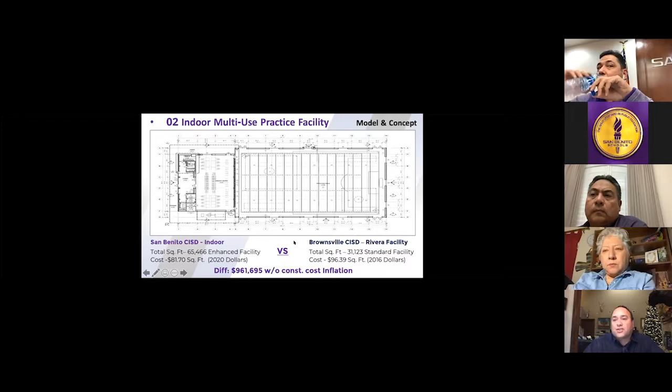The Brownsville Rivera has a total square footage of 31,123 square feet. We want to call it a typical standard facility, just given the fact that there were a lot of limitations to that design, as well as the overall construction project. Back in 2016 they constructed that facility at $96.39 a square foot. Through all of the needs assessment and what the district was looking at realizing with this facility...

The Brownsville facility is a 60-yard facility with limited markings, but San Benito instructed us they really wanted a full multi-use practice facility. We reverted to an 80 to 90-yard unconditioned practice space facility. Really, the reason we went to that length was so it could accommodate your marching band formations. So it's really suited not just for athletic sports, but it accommodates band and so forth.

And we'll go further into it, but this is the general scope. Your building is 65,466 square feet, as you can see, more than twice the amount of the Brownsville Rivera facility. The cost, once we went into both GMPs, we got it at $81.70 a square foot, much lower than Brownsville. The next page will go on a comparison.

So if you look at that, those are 2020 dollars, 2016 dollars. The difference in the cost per square foot, we got obviously a better deal, at about a savings of $961,695, and that's without construction inflation from 2016 to 2019. We really started in January of 2020, but in 2019 we were doing the offsite utilities.

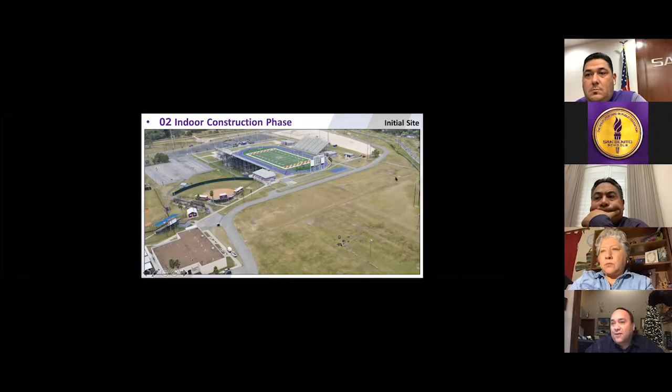This was the original site prior to us getting started. So really, when the site was selected, a question came up about why we're a little bit further on this side. As you can see, there are overhead power lines here, so in order to evade a lot of this, we shifted the building a little more further west.

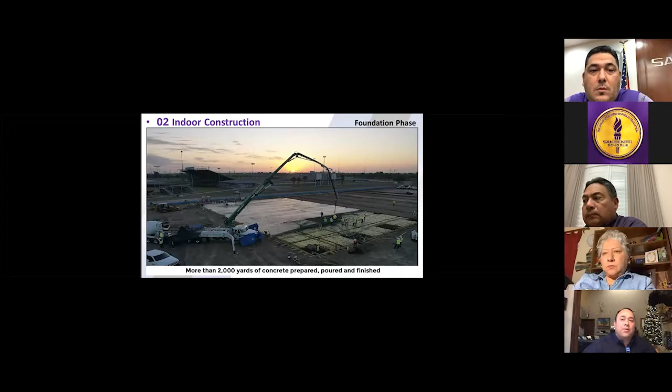We poured more than 2,000 yards of concrete, prepared, poured, and finished for this project. All pouring started at 3 a.m. and carried on to probably midday. Most pours are scheduled early in the morning, giving the crews a chance to finish the pour, as well as all the required prep work and finish work they have to do.

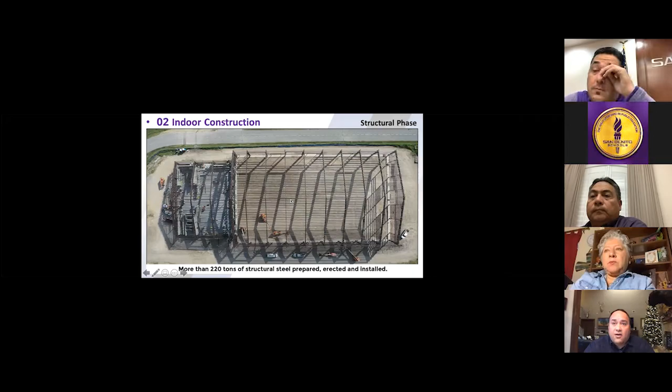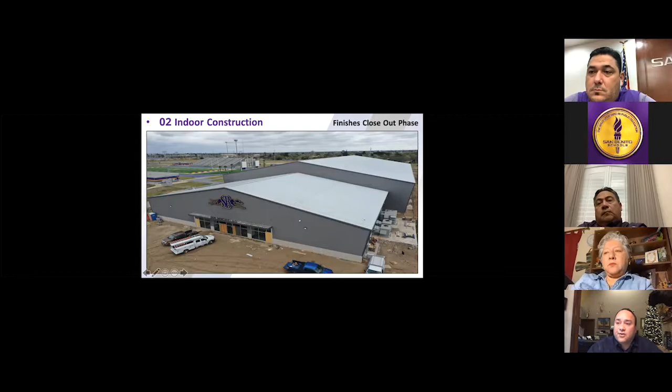This is obviously the conditioned space area, as well as here's the unconditioned practice field. We still need some of the fencing that goes around here, some sidewalks, and then we are working on the plaza, that's the entry point.

This faces the football field. It's particularly designed for the run out of your team. But if you look at it from the field, you can see that color paneling. This shot was taken yesterday.

This is compression flooring. As you can see, these are all the decal mats. There were 40 of them to accommodate your equipment, your weight room, weight equipment.

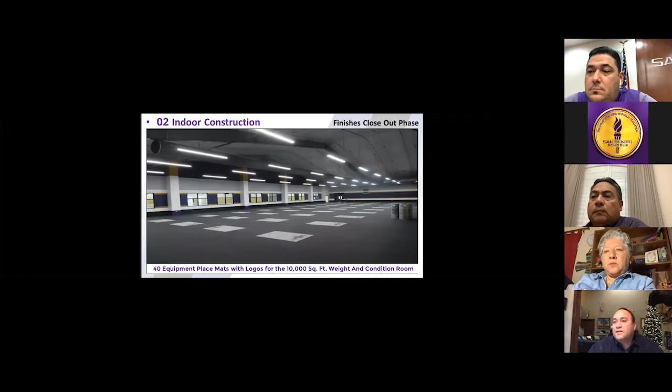48,000 square feet practice area. It has eave heights which are on the far end of 30 foot. The Brownsville Rivera is 25 foot, makes a difference when you get to the peaks. And as this roof, where we have peaks of up to about 50 feet, which is considerably larger.

And when you walk in there, this picture doesn't give it justice whatsoever. When you walk in there, you'll feel how big that thing is.

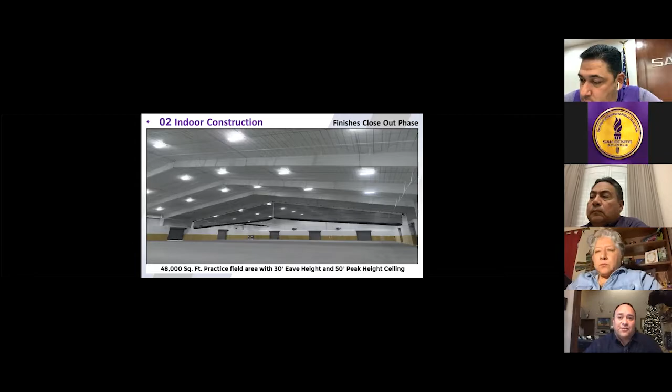Again, we got the roll-up doors, you can see they just roll up. Brownsville had that kind of pull-out garage door, overhang door, and then they had big old fans that were hanging as well. So they recommend that we reconsider the design based on those issues.

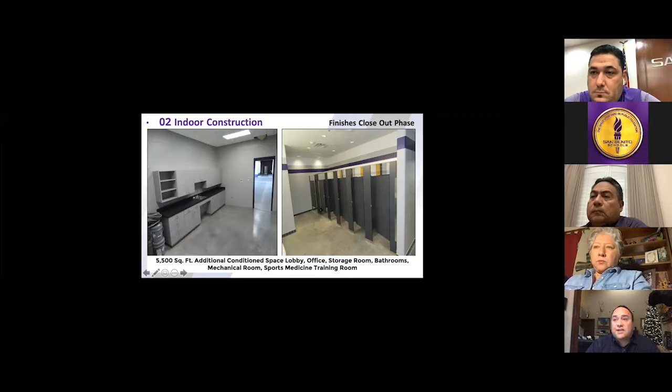This is the plaza, this is the finish out. We just got the construction trailer removed from the site. We needed to remove it.

There are 3 options right now that we're working with PBK and the Hefner Group to finish out what the front courtyard will look like. These are just 3 simple options. David can elaborate as we get further into the question and answer phase. We're working on different options for that plaza, some pavers in the middle, and we can do relatively anything. So it's not limited to these 3 options.

We need to finalize in the next week or 2 weeks so that we can start coordinating construction. The Hefner Group did all the vertical construction related to the facility and some of the sidewalks. We felt it would be a cost savings to the district if we worked with the district to coordinate what's remaining in regards to the courtyard, some of the irrigation needed for the grass, and the mulch that will be installed.

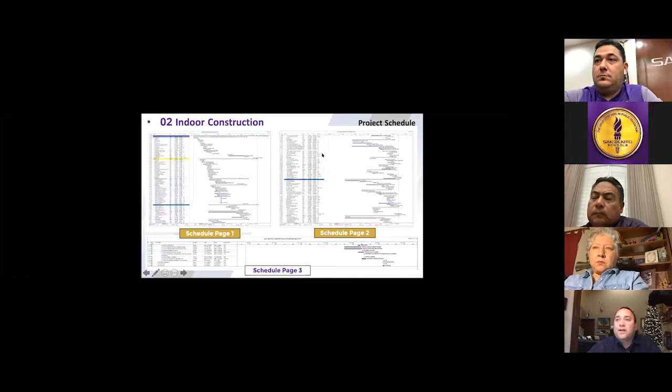This was a respective schedule since we started. I just wanted to throw it up there. These are a continuation, but in the next slide I'll show you where we stand and how we're wrapping up. But this was the overall schedule. These are the closing items, milestones, and dates.

As David was saying, we are at the closing period. There are the perimeter concrete sidewalks inside 2 weeks. Everything's relatively inside the 2-week period because we're there daily doing all these closeouts: the HVAC test and balancing, the mechanical closeouts. I talked about the fencing exterior, the HVAC units, the wrap up on the installation of the storefront, the fire alarm system, exterior signage.

And then the last thing they do, the field turf, is the absolute last that's ever done on one of these types of facilities, as well as the wall padding. So we're slated to be done within the next 2 weeks. In the next few days, they're going to start that installation process. We are scheduled for a building inspection February 2nd and a closeout February 2nd as well.

Again, I listed the items. The additional items for scheduling are the plaza, sidewalks and pavers, as well as the irrigation system and the hydro mulch. And we are pending a ribbon cutting date that we'll work with you and the superintendent to set, and be ready to open that building.

Well, we're on slide 25. This is where we're open for any questions. If any board members would like to ask any questions, again, David and I, as well as the rest of the team, are here available for any.

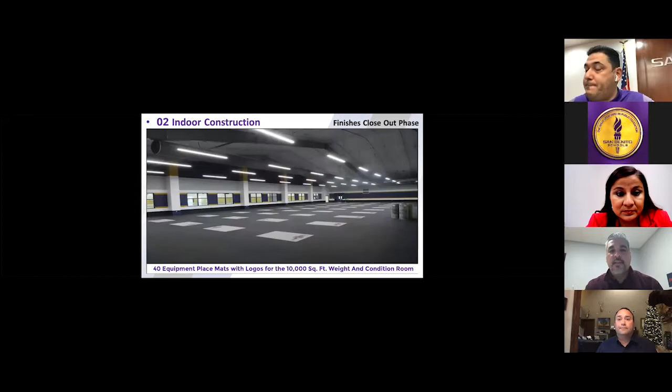And what is air conditioned? Is it the whole facility? It is, and that's what we're referring to as conditioned space. It's 15,000 square feet of that building, the lower part. Let me try to go back. It would be the main entry lobby, the restrooms, offices, and the weight room. That's the bigger volume. Everything beyond that, the practice field, is not air conditioned, but it is insulated. So it's naturally ventilated. This is the only portion of the building that's not on an HVAC system.

Okay, so what temperatures will the kids be experiencing in there in the summers if they're practicing in above 100 degree weather? How hot or how cool will it be in there? I'm not sure specifically, but the insulation on the roof, being an entirely covered space, naturally ventilated, should give a temperature difference of 10, 15 degrees, maybe even more, depending.

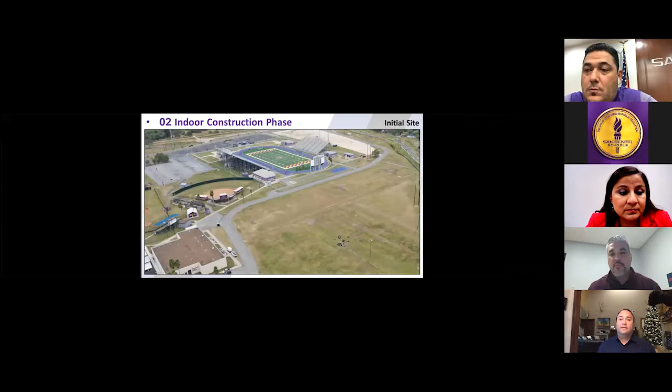This will probably show you, if you can see the screen where the doors would be, they're all around the building. You've got a dominant southwest wind, it's never still in South Texas, so you're going to get that natural southwest wind blowing through there, bringing natural air in. We'll start gauging the temperature in there, but it's definitely a lot better than being in the elements with no cover, no insulation. That's really why these facilities exist, to keep the kids away from the elements when they need to be in the hottest part of the day or when there's adverse weather. That's particularly what these buildings are used for.

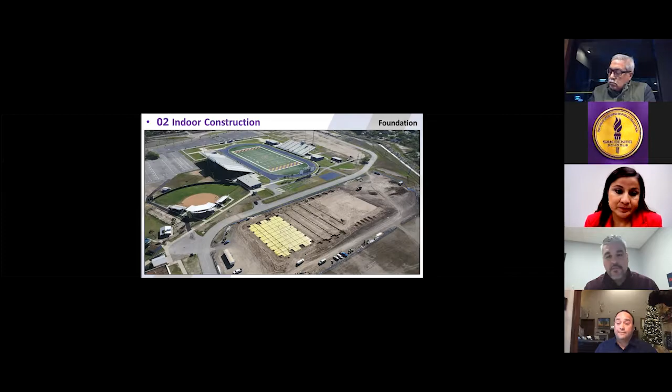So when you say naturally ventilated, that means air from the outside coming in through those doors? Yes, sorry, I should have clarified, that's correct. That's why we have these big overhead doors around the building. They can all be opened, controlled individually, electrically, with operators. So with a push of a button they can be opened or closed, governing which ones they want open or closed. There are also vent grills, so if the doors are closed the building is still naturally ventilating. Obviously with the doors open, a bigger volume of air flows through, but there are vents to ventilate the building as needed, code-wise, with the doors closed.

Now I will add, the building is preset to make it conditioned as well, that's why it's insulated. So if the district ever wants to revert to this field being conditioned, you can do that. Obviously it's going to cost a lot of money to air condition 48,000 square feet, and I wouldn't suggest it on the M&O side, it would drive up that bill. But at the end of the day, most of the facilities we've been around use unconditioned space with natural air, that's where positioning the building is critical, so they get the natural air coming through, keeping temperatures down and keeping them away from the rain and other elements.

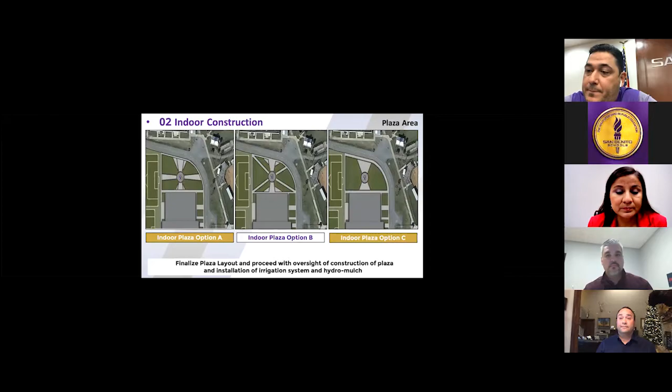Mr. Palacios, just to be very clear, it's optional whether they use the facility on a daily basis. If our educators or coaches feel at any given moment that it's too hot in there, they can go outside. That's pretty much the way it's always been.

I'll challenge that, we've been through these facilities in the peak of the heat. We were in the Brownsville system and it was very comfortable there. Theirs was designed to take in the southwest wind, so it's not hot in there.

The district maximized the use of that facility. In fact, all the other high schools are fighting the fact that Rivera has theirs, because it's worked for them. The majority of the ones we toured were non-conditioned; a few were conditioned, but you have to pay for that, and at this point we wanted to stay within budget. It's nothing that we advocated, it would definitely have taken us over, but it can be an addition for the future if the district decides to. The conditioned facilities we've done in the past are 40, 50, maybe 60 yards max. This one exceeds 80 yards, so it's a big facility.

Thank you, Mr. Palacios. I guess you want to go ahead and continue with your presentation, sir. Sounds good.

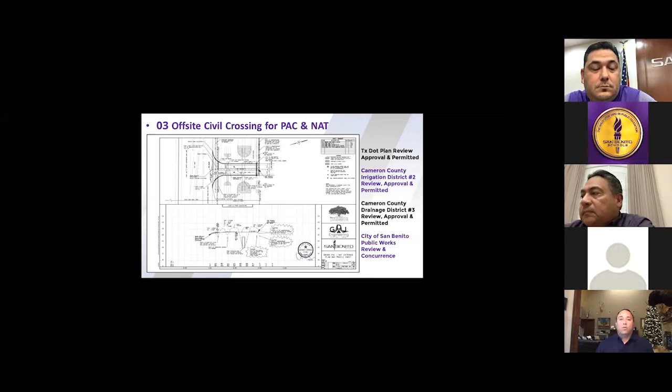Section 3 is the offsite civil crossing for the PAC-NAT. GDJ engineers are the engineers of record for this project. What may seem to be a small project is not. There are three jurisdictional groups that oversee this area: TxDOT, Cameron County Irrigation District number 2, and Cameron County Drainage District number 3. They all had a requirement to review the design and construction documents, as well as be involved in the permitting.

This is just one sheet of many sheets that go along with it. There are three elements to the project: an irrigation siphon, which I'll show next, the drainage crossing, and the roadway access that was part of this.

There was an active review and concurrence with the city of San Benito, with a lot of correspondence on that. Separating myth from fact, the city has no jurisdiction whatsoever in this area. What they have is an easement for a 20-inch water line that runs along this frontage, held by easement with the drainage district. They don't have records of their lines, that's another challenge with the city, they're not a good depository of records for their systems in this area. GDJ has been assisting them, as well as our group, to identify what's where.

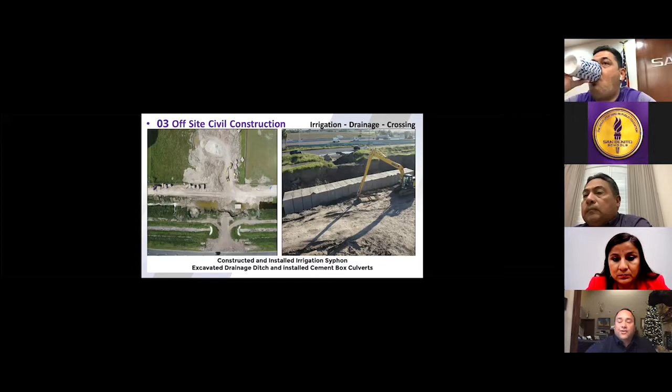This shows the backfilling of those box culverts, and this is another stage of that backfilling.

This is the roadway crossing as they're prepping it. The soils are challenging, so everything's lime treated there and tested as well. This is the prep where they're setting in the rebar. It is a concrete crossing to handle all the heavy traffic, as well as provide longevity for the end product.

This is the water line that the city could not locate. Their surveyor and public works guy believed it was about 5 feet closer to the fence line. The sub for XM construction nicked the line, as has been heavily publicized. There was a water line. Originally they said they lost 1 million gallons, then the city came in and said 30 million gallons. However, we don't have a storage tank that holds that much water.

However, that day when the XM subcontractors hit the water line, they controlled the shut off near the water tower. It was stopped, and then work was done. Now, by request of the city, GDJ Engineering designed a steel casing, which is what you see on the right-hand side. That steel casing is a protective casing of the water line for the full extent of the crossing. It was placed, welded, and completed. That's the image.

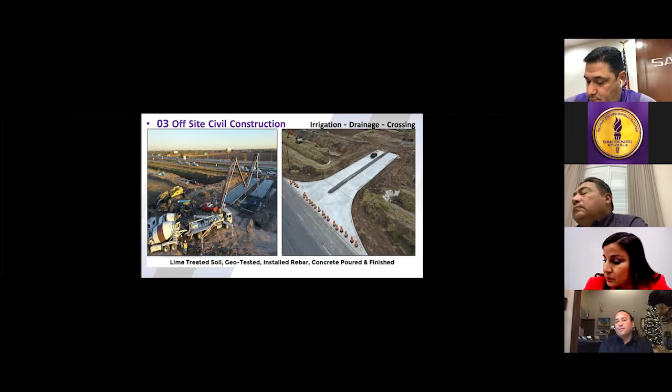That was the pour, again on lime treated soil, geotested, with all the rebar installed and concrete poured and finished. Those are images of the pour on the left, and that is the finish of the crossing. They're not completely done yet; they still need to do the head walls for the drainage. They're scheduling that now, probably within a 14-day period, wrapping up that segment.

Section 4 is site civil for the PAC and NAT GMP. This is just one sheet. Again, GMP is a guaranteed maximum price. Obviously with 3 facilities, you can't just build a building without offsite and onsite utility needs, which would be the water and sewer.

This land we started with was farmland, complete farmland, as you can see in the image. There are no utility lines in there, no subdivision, no plat. It's raw land contoured in a manner that serves the purpose of farming. So we had to start working again with our engineers to develop a site plan that would help with access. These are the civil elements we worked on in this scope that went out for bid.

Offsite utility connections with the city sewer system—that sewer system is off Alamo Street. I encourage you to go down there; there's a lift station on Alamo Street that the city needs to address for structural damage. We did an assessment; the city asked us to work with GDJ Engineering to do an assessment. They did an assessment on it, which led to negotiations on what role the district would play and what the city would do.

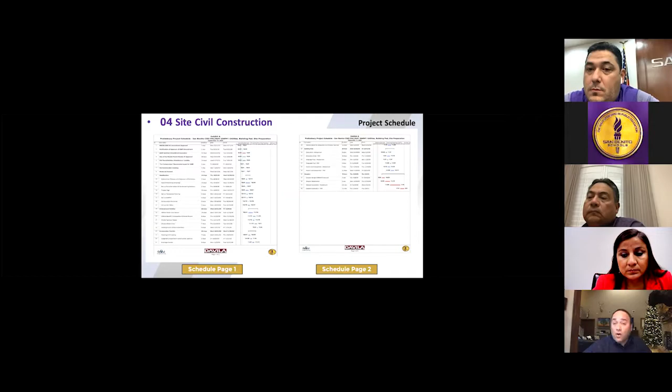As I said, they are already under construction. The bids and procurement have already been done, and contracts negotiated.

These are images of the site clearing. The job trailer is already set in place. These images show some of the work that's been done. As you can see in the back, the cement crossing was already done. This is the access to 8th Street.

Again, the city requires us to lay in caliche rock to help with the heavy traffic as we're accessing 8th Street. We're not planning on using this as a primary entrance into the construction site, because 8th Street is a residential area. It is a last option. Right now, it's listed as a primary option, but since the crossing is already in place, Davila Construction is going to use that as the primary entrance off the expressway, with this being a secondary entrance.

As you can see, it's gated, so the entire construction site is already a controlled site, and you'll see that further in some of the images.

This is the sewer utility pipe that's already been delivered on site, and they have a storage construction trailer out there. On the right side, I can't recall, Robert, how thick this was, but it was a very thick report.

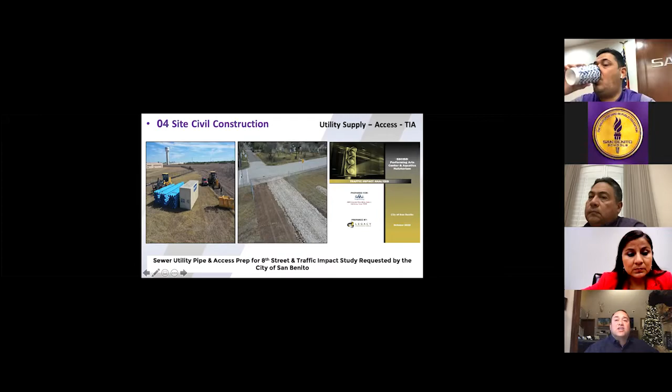It's a traffic impact analysis required by the city of San Benito to address any influx of traffic that will occur once the project is completed, and what this area will experience at the intersection of 8th Street and the PACNAT site. This is just the cover page of that report, which was delivered to the city for their review, and they've already done their review process. GDJ Engineering is working with the city to finalize what this area will look like.

This is the drainage swales. As you can see, the fencing encompasses the entire project site. The drainage swales are wrapping up; they're almost completed with it. From here, they're reverting to accessing utilities, the pad site, and the staging area.

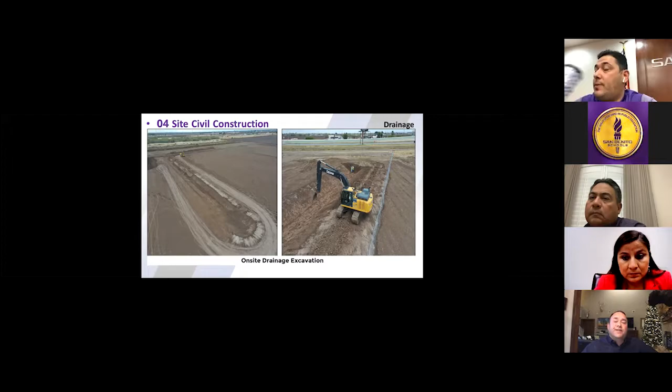Which leads us to the vertical projects. So without these buildings, in order for them to breathe life, all of these things need to be done. It's not just vertical construction of the building; it's all the support facilities needed, the water, utility, drainage, and access.

In regards to the performing arts and the natatorium, this is your project team. Again, some of the same faces: Davila Construction, GDJ, and Engineering. Again, these aren't your typical school buildings. These are highly complex buildings — a performing arts center and a natatorium.

We toured a lot of facilities, and I think it was a major eye opener for some of the board members that joined us on how complex these buildings really are. So at this point, I'd like to turn it over to Mike Alex. I know your IT representative is going to give them access to share screen. I'm going to stop sharing my screen, and then Mike Alex will take you through a few slides, and then I'll wrap up on some points that will be discussed as we close this up. So Mike, it's all yours.

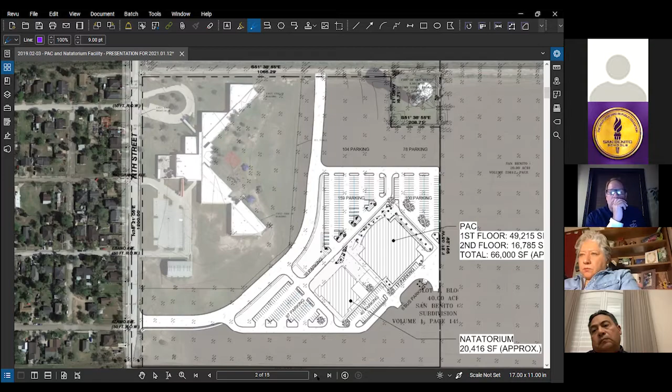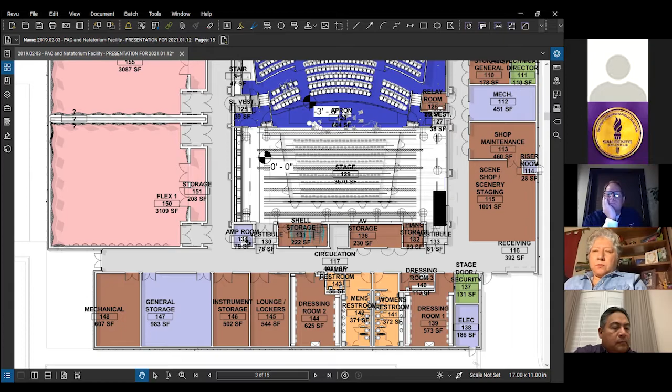Moving on back up this hallway, there are 2 flex rooms. These would be used for dance, rehearsal, and warm up, so that students could warm up here and perhaps even perform here and move back and forth from the stage into these. These are going to be really key when you have UIL competition, where you have 2 or 3 bands or performances going on over the course of a day, and you need to have these ensembles move in and out of the stage area into other quiet spaces where they can practice.

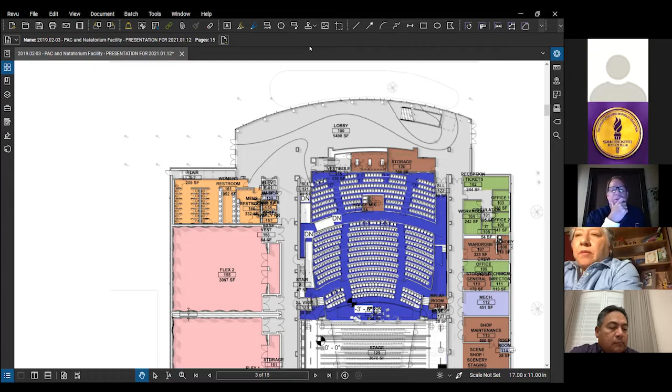Restrooms are here in this corner, and it's also important to note that this back of house, so to speak, is isolated from the more public spaces. There's a pair of double doors here and a pair of double doors there that keep people in the lobby space moving in and out of the audience chamber, but not necessarily back into these other areas unless they're given permission to do so.

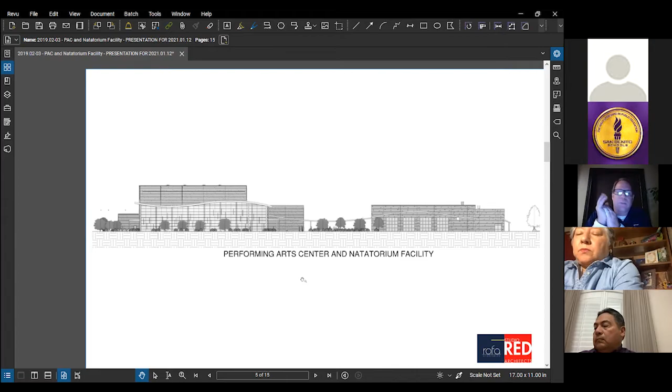This is a front elevation of the building if you haven't seen it. We put this in here mostly in black and white just to show you the primary design concepts that are holding these 2 buildings together. As you know, these buildings have completely different performance characteristics. They have completely different programs, and we thought long and hard about what they really have in common besides being school district buildings.

The one thing we do find they have in common is this concept of a wave of sound for performance, a wave of water in the natatorium. So we've amplified that wave in a series of waves in the architecture. That architectural wave happens here, and here, and goes over the canopy that connects the 2 buildings, and then continues on as another canopy on the natatorium building. I wanted to show you all that so you understood the concepts, that we just didn't throw a couple of curves together and say, look at that pretty building. There was actually some deeper thought process about how we connect the buildings in a symbolic way too.

Here's the front elevation of the building, looking from the parking lot at the Performing Arts Center. You can see this wave as it carves through the architecture and then continues on as a canopy towards the natatorium. You'll also note that there are segments and connections in the glass itself, in the storefront glass. These are actually notes that you would see as you would read sheet music. So there's another symbolic measure behind all that too.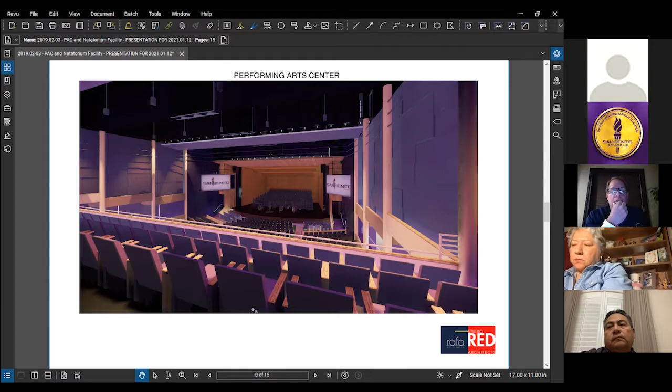Here's an interior. Again, spirit is a powerful metaphor too that we're using, so there's a lot of the school colors, district colors, in the architecture. What you're seeing here is up at the balcony. You're in one of the back seats in the balcony, to show you that there's really not a bad seat in the house. Sight lines were very well thought of, and we thought long and hard about how we would create these spaces so that everyone had a good seat in the auditorium. This is one of the back seats in the auditorium, up high in the balcony.

Now this is a back seat at the ground level, and it too has a fantastic sight line, since of course the stage is elevated. So it really helps give everyone a view to the stage.

Before I go to the Nat, I'd love to open it up. Any questions on the PAC, the Performing Arts Center? Did y'all have any questions or thoughts or comments?

I think that was creative, to tie it in with the wave, how you all came up with that theme, using the San Benito colors. I think that's good also. It kind of reminded me of the one that's in the UTRGV area. Is it similar to that one?

The hallways reminded me of it, but the one that's by the Resaca at UTRGV, TSC, yes, that's the same architect. Studio Red is our specialty architect, and they also designed that facility, so that's where you'll see some similarity. Theirs is more of a conical shell, where ours is more curvilinear forms, but you can see the similarities.

And how much is this building costing the taxpayers? Well, I'll cover that in a later slide, Mike, if we just take budgets a little bit later into the Q&A.

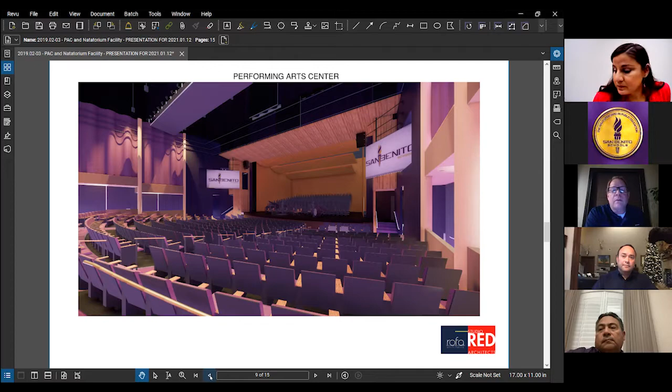Very good. Any other questions on the Performing Arts Center? I'm happy to answer them. Was there a revision on the seats? No, we got more. Actually, there was an addition.

There's an addition, sorry. Mike, you want to cover that? We got the addition based on reconforming the balcony. It's always been a goal to have 1,000 seats. Mike, you want to take it from here?

It has been a goal to have 1,000 seats, about 800 in the audience chamber at the first level, and then another 200 or so in the balcony. What we have done recently, though, is that we had a little bit more seats than 1,000, very close to 1,000, but a little bit more, because we did not have these middle aisles up at the balcony.

And we thought, and I think everyone has agreed, that it is much more desirable to have this kind of situation where you can flow in and out of these seats a little bit better, rather than have an entire row of seats and a center aisle or no aisle at all. So this is much more workable, and it eliminates a lot of disruption that could happen during a performance.

But the only other change that we've made, I can think of, is just in the most recent times, maybe in the last month or so, the addition of these two intermediate aisles to create better circulation in the balcony. And we really didn't lose any seats, maybe 2. So we thought that it was a really good move.

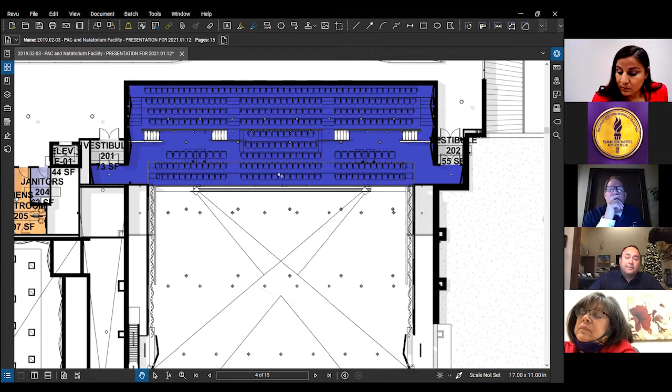If I could add, Mike, going back, I guess I'll get it when you go back to the overall floor plan. Sure.

Hey Mike, I got a comment. This is Orlando. I just wanted to, once again, thank you guys so much. I know when we first started, everybody had visions of what they wanted and what they needed, and of course we wanted to stretch the dollar and maximize that bond money. But one thing you guys have stayed steadfast on is maximizing the seating capacity in there. I just want to thank you guys so much for being creative, and thank the architects as well. I think they've done a tremendous job with the resources available, and you guys have done a great job with that. Seeing it from when it started to now, I just want to thank you guys, because it's awesome to see this transition develop into an awesome facility for our kids and our community. Thank you for that, sir. Thank you very much, appreciate it.

Mr. Lopez, initially, what was the seating supposed to have been, when the bond issue was coming out? Wasn't it a little bit more seating, or am I incorrect? No, that's incorrect, Ms. Yanis. I think one of the things was everybody had opinions of what they wanted, but then once you put pencil on paper and figured out the finances and how much it cost, we had to be realistic. So at one time there was dialogue that they wanted 1,200, 1,300, and then it came back to 1,000.

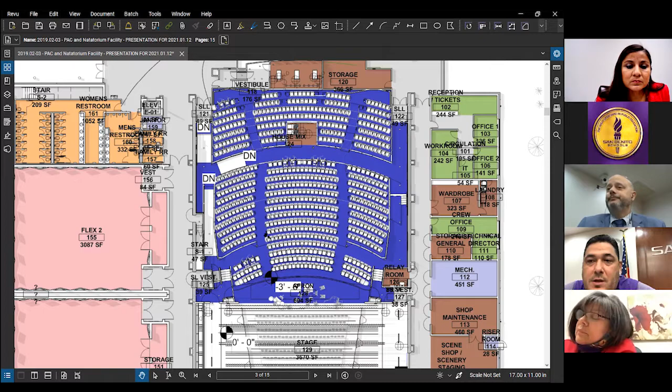The majority of the people that voted for this bond, trust me, they're extremely excited about what they're seeing. So nobody was misled. There's 3 new state-of-the-art facilities, and that's where the bond money is going. We're being very transparent, and this is what it is. So once again, I want to thank you guys so much for putting this on paper and seeing it come to fruition right now. It's just amazing, and I think it's going to be great for our community that's longed for this, as well as our students and our staff.

Thank you. So are the people that sit in the flex areas going to be able to see the performance? Like how are they going to see it if you have the band performing or something? Would it be through televisions, or how's that going to work out?

So again, those spaces would be used for things like convocation and graduation. We would not open those. It's very unlikely we'd open those for any type of theater or band performances. So yes, if we're doing convocation, we would have video screens or drop-down screens, and audio in those rooms so people seated there could still see and hear what's going on. But as far as our performing arts, fine arts performances, I think currently we'd be hard pressed to have more than 1,000 people in there, but we will use just the 1,000 seating area.

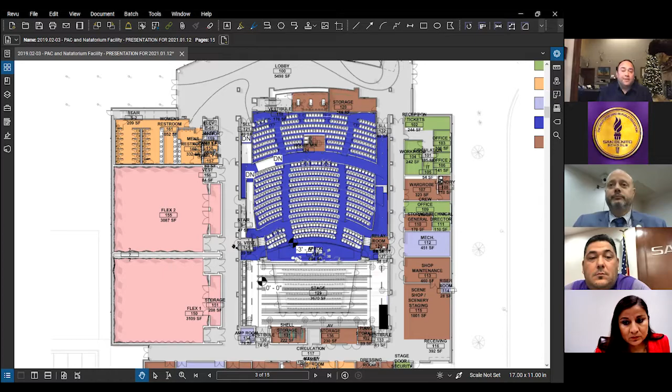So Mike, if I could intercede, the purpose of me going back to this floor plan was, when we first got started, every consultant came down and we did an intake with your users. So this wasn't driven by the consultant. We met with band, orchestra, every one of your users in the district. When we consolidated all of the max performances for all the performances the district has had, the largest was under 800.

And those were the larger performing band deals. Mike, do you recall? At the end of the day, the design kind of exceeded your current use at this point in time.

I know convocation was a big deal, but when we break down the cost, what you see in purple, every seat and the cost in this area is far greater than the cost of any space in the flex room.

Our goal was to maximize the auditorium, but at the same time assure that you had more than performing arts, that you also had the opportunity to host other types of venues and meetings, and that's what these flex spaces are for.

The reception area—all other performing arts centers we've gone to utilize the reception area for various galas and different uses. The university uses theirs differently as well.

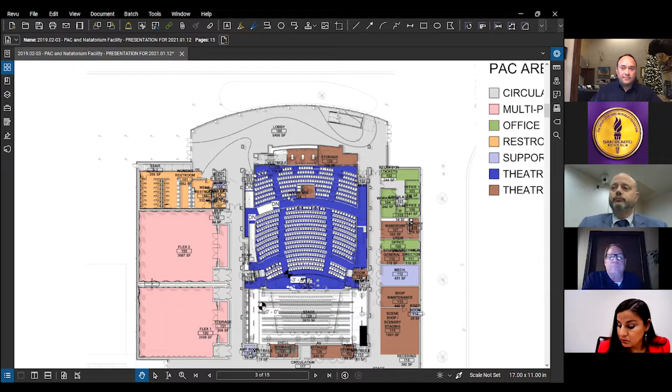Thank you, Mike. So, any other questions on the Performing Arts Center? If not, I'll move to the Natatorium.

I'll do a little annotation here so you can see. This is an entrance, and this is an entrance.

And to give you some bearings: the parking lot is at the top of the page, the back is at the bottom of the page, and the canopy that connects—which you saw in the renderings—is right here, where this purple dot is going back and forth.

And if you are parked out here where my purple dot is, then you would use this entrance here, which is really where the lobby is.

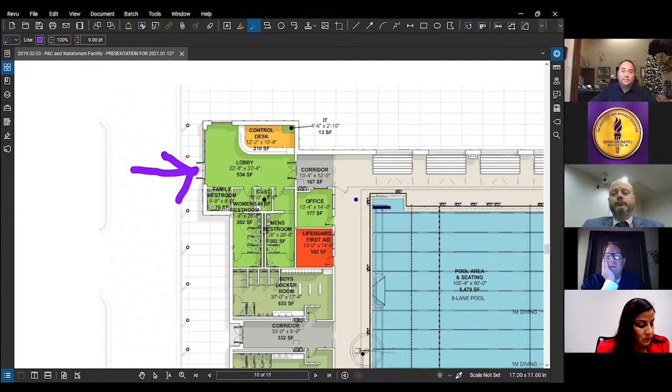And so from there, you have these two pools. You have an 8-lane swimming pool with the 1-meter diving boards.

You'll see here that there are nine overhead doors. The prevailing breeze comes from the southeast, which, if you live in the valley long enough, you know the wind blows from the southeast about 90% of the year, and that's where you get most of your cooling. So the cooling effects of our prevailing breeze come through these windows and overhead doors, and cool the pool.

And then they exhaust out here. So this whole area around the pool is the deck. You'll see there's 8 lanes and a handicap lift to get you into the pool if you happen to be handicapped. There's also a portable riser for events where they can have meets and things of that nature.

But this is not primarily a competition pool, this is a practice pool. So there's also a secondary entrance right here. This is an important concept you see in a lot of these types of pools that students use: they're coming in and out of the water wet or dry, and you try to have the wet areas isolated from the dry areas. The students will normally use this entrance to come in and out and go into their respective locker rooms, then come out and swim, then go back to their locker rooms, and usually exit here, or if not, it doesn't matter if they're wet beyond this point because they're going to the outside. So that's one concept that's part and parcel to the design of these spaces.

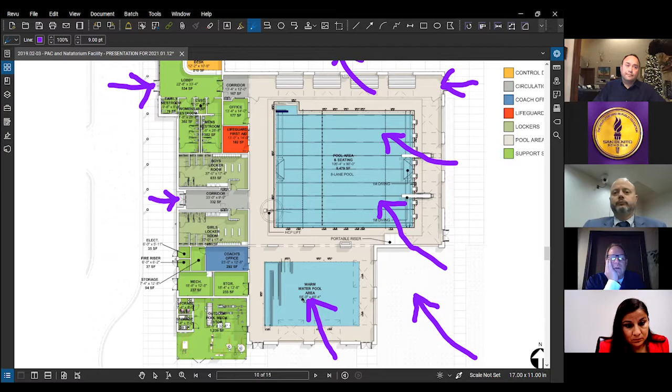It's important to note that the warm water pool is an alternate in this package, meaning that if the price is right, you all have the opportunity to elect to build this portion of the project. That's a warm water pool area used for water aerobics. It's also, I think, where the district endeavors to teach the smaller students how to swim. It also has a handicap accessible ramp to get into the pool, which is much more dignified than using the handicap lift. You can actually wheel your wheelchair all the way into the pool, making it a lot easier to get in and out if you happen to be disabled.

And that's about it. I'll show you a couple of the interior and exterior images that we have in here. This is from the warm water pool, and you can see beyond this is the competition pool, and you can see the ramp in the foreground to get into the pool.

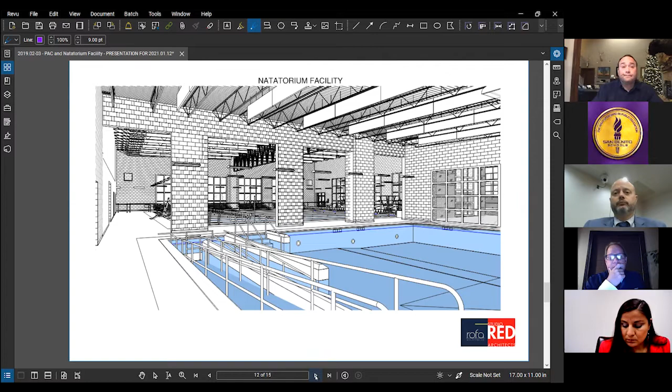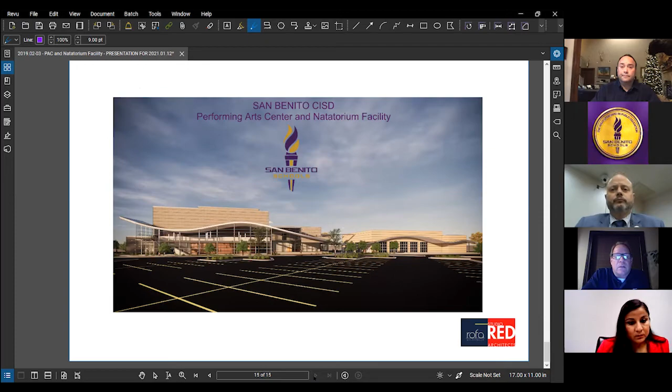And there's another vantage point. This is the vantage point you would see from the expressway. We'd be a little bit higher if you're on the expressway, but this is what everyone will see as they drive in a southeasterly direction to the island or Brownsville. So this is putting its best face forward off the expressway.

Do y'all have any questions on the natatorium? I could go back to that if you'd like me to.

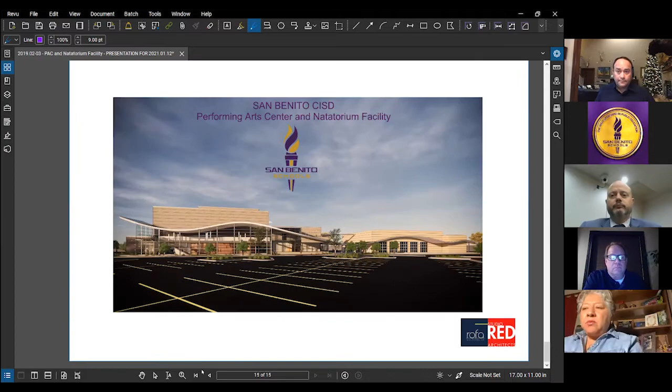I have a question, Mike. Are we going to have security cameras installed in these places, just in case, God forbid, something happens? Will we have everything covered and on camera? Are they going to be installing the security cameras too? Yes, there will be security cameras and card reader access control throughout both buildings. Great, thank you.

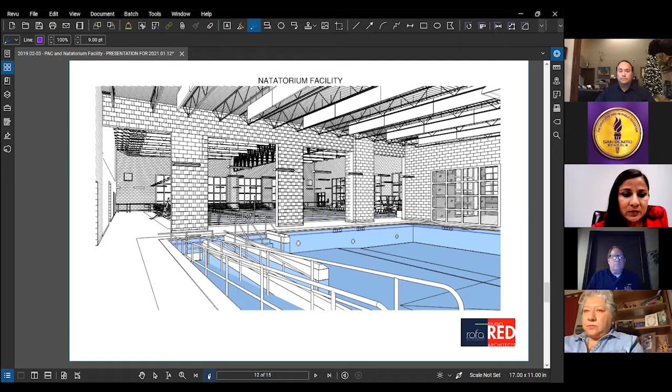Thank you. Dr. Carmen, I have a question. Who will be maintaining these buildings? Do we have a budget for those employees that will be maintaining, or are you going to be using some of the same employees or hiring new employees? Because I was thinking, who would maintain the swimming pools? Who's trained, or is there going to be training on that? If you can explain that a little bit, please.

Certainly, yeah, we will have to add positions to take care of these facilities. Primarily, the natatorium is a very specialized area. We want to make sure we take care of that pool, so we'll have it for years to use. Those are not budgeted right now, but we have 2 years to work that into our budget, probably before we actually get to use these facilities. So yes, those new positions will have to be built into future budgets.

Do you know how many staff members it would take to maintain these? I could estimate - I think your pool specialist and theater specialist had some ideas, but minimally you need one person to take care of the pool, whether that's full-time or they can do another duty. Custodial staff, since it's not used very often, you probably don't need a large staff over there, maybe one full-time person, and bring people over when we have events.

I think we had discussed - nothing has been decided - but I know we had discussed the possibility of adding a fine arts director and housing them over there at the Performing Arts Center. So that person could then schedule the use of that building, make sure that when events are held, everything is scheduled and taken care of.

And then as we add swimming and diving, we're going to want someone who can coach. Whether they're full-time or part-time, whether the coaches also do our lessons for our second graders, we need someone to be able to provide those lessons for our kids.

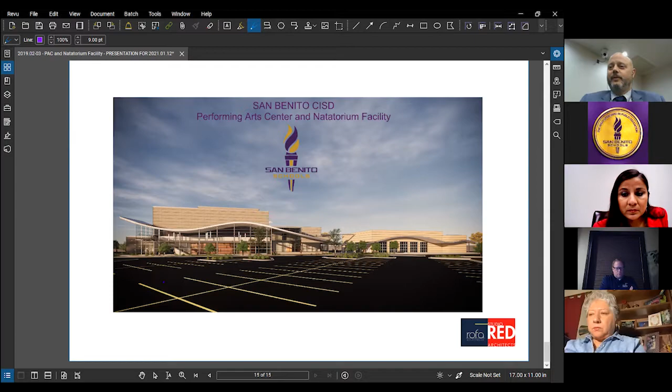And who's going to be using these two buildings, the PAC and the NAT? So there will not be a full-time use of the Performing Arts Center, like on Monday, Tuesday, Wednesday during the school day. We won't have classes over there because they are off-site. This will be for when we have performances, for when we host events, obviously practices leading up to theater arts or band. They'll be over there for days leading up to those events, but it will not be used on a daily basis. The Natatorium, we intend to schedule second graders to go over there on a rotating schedule from each of our campuses so they can take some introductory swim lessons.

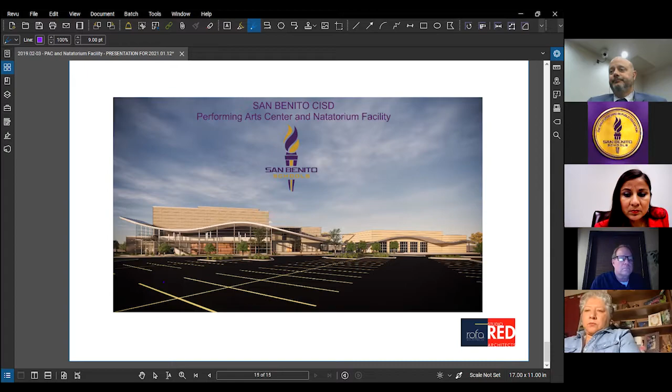Second graders, is that what you said? Yes, ma'am. Thank you, Dr. Carmen, because I was going to ask about that. That's still on the plans. I think it's a wonderful idea. Like everything else, the Performing Arts Center and the Natatorium are beautiful facilities and so forth.

My question had always been - and Mr. Palacios might need to answer this - like everybody else, when you're trying to build a home, you come in with, I don't know, 4,000 square feet, or let's just be more realistic, 2,500 square feet, but yet you want to pay only $120,000 for it, which isn't realistic based on square footage. But my question is, we all wanted it there, and I know that to me it was a nice location to have it. But my question is, what flood zone is it in? And if we had to raise the elevation on that, what were some of the obstacles that we were facing? Because sometimes we want something, but that doesn't mean it necessarily has to be that way.

That we were given some type of counseling or advice as to whether that was a good location to build, because it seems like we've had a couple of snags along the way. I don't know if that's based on where it was going to be located. Even though I think that was a beautiful location, sometimes what we want and what's really supposed to be isn't the way it is.

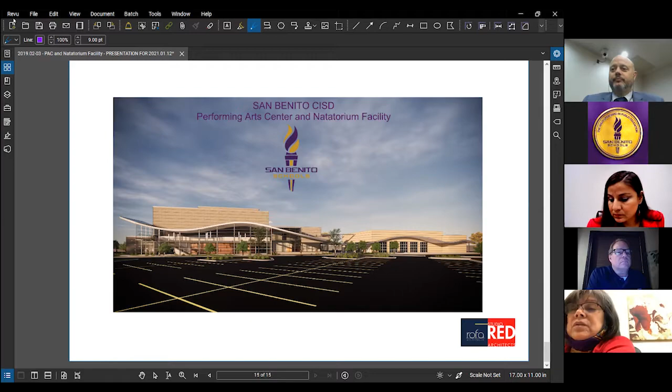Could you elaborate on that, Mr. Palacios? Well, it'll be a few of us elaborating, because the location is a beautiful location, absolutely. The adverse part is the challenges of a platted, more prepared site as opposed to an agricultural field. That always has challenges. The indoor did not have that, obviously.

However, regarding two facilities, taking the benefit of cost savings by going under construction on both sites with one contractor led to more savings. The only challenge is there is no flood zone issue there.

The issues you have there are similar to what you're going to have everywhere else in San Benito. The composition of the soils in San Benito isn't very good. That is why on 8th Street and some other locations you see failed roads. You see a lot of this all along, and it's not San Benito's fault. Geographically, every site's going to have its challenges.

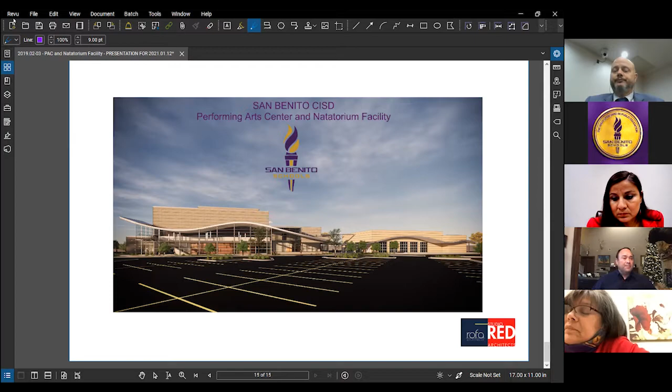In regards to access and all of that, again, we took the challenge. We found that the benefits of keeping them together on a larger tract lended itself to higher visibility, better access in regards to programming. At the end of the day, some of the challenges we overcame by finding alternatives regarding the soils.

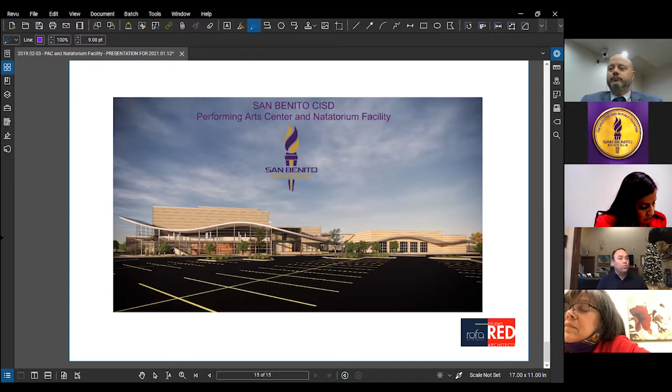Isidoro is here, and he's our geotech. He'll plainly tell you that just there and all through that area, there are going to be these challenges regarding soil. However, just like in cities like Houston and New Orleans and other cities building big facilities on challenging sites, there are alternatives that lend themselves to something that won't drive the price up but will remedy the challenge.

And I know that you probably still have more questions. I may not have answered it fully, and Robert's there.

What I'm asking is, what zone is it currently at? Because you are emphasizing that it was an irrigation field and so forth. I'm just concerned, rather, did we lift the elevation? Has it been elevated? Did we have to fill in 21 acres of 2-3 feet? What were you looking at? That's what I call challenging, in the fact that it needed more than what we thought, and maybe the location wasn't the greatest location.

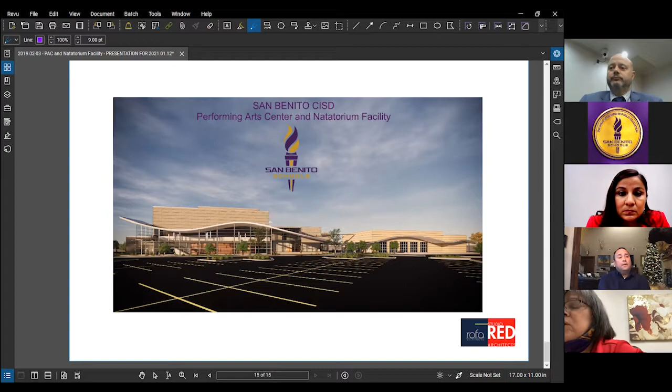And then you're talking about soil. Are we talking like, what, clay? What are we looking at as far as soil is concerned?

Loose, and Isidoro is there. Isidoro, you want to take a run at the soil type? Yes, Ms. Janice. Good afternoon, everybody. Isidoro Arjona, I'm with Raba Kistner Consultants. I'm the engineer responsible for our valley operations.

From a geotechnical standpoint, this site is very challenging. We have a combination of expansive clay soils, but those soils are also in a soft or loose condition. So we have the potential for both expansive soils with shrinking and swelling of those clays when they get wet or dry, but also the potential for settlement, especially with larger buildings like the performing arts, because those are heavy loads. In addition, we have a relatively shallow groundwater level on site.

So the combination of these challenges initially prompted us to recommend drilled piers, deep foundations to support the buildings. But that, I understand, was driving the cost significantly higher than originally budgeted.

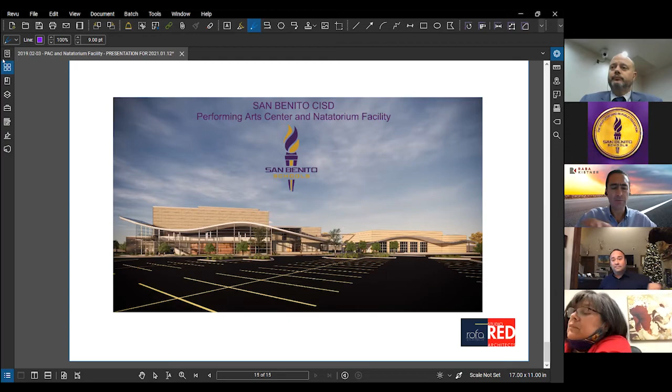So we presented to the team the option of a ground improvement procedure, basically a system called geopiers, which are similar to concrete piers, but these are made of stone. They're put at sufficiently close intervals throughout the footprints of the buildings to densify the soils and then allow for the buildings to be constructed on shallow foundations.

That will resolve the issue of settlement. The issue of the expansive clays requires some over-excavation and selective replacement of the soils underneath the footprints of the building, so that was also incorporated. I'll be happy to entertain any questions.

So what elevation is it at this time? You said there was excavation and all that kind of stuff. Where is it? Where are we at as far as the zone? Are we on a C, on an X? What exactly are we on?

I think that's a different question, Ms. Janice, and the civil engineer, Robert, can better answer because that relates to the finished floor elevation. The recommendation of over-excavation from our standpoint is simply to reduce the potential vertical movement from the finished floor elevation. But as far as the flooding zone or flooding risk, Robert, I think you can better answer that.

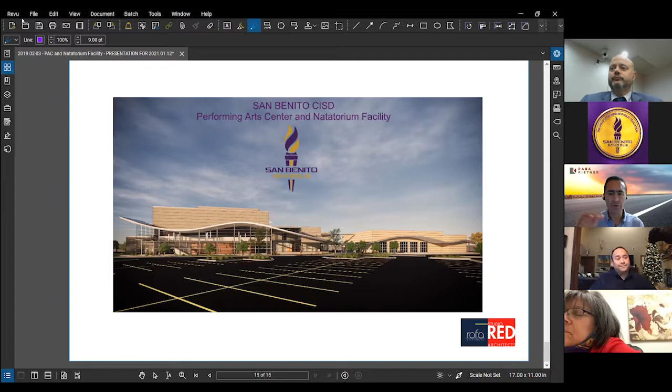Sure. So this site I believe is a zone X, and I will confirm that. But the site itself actually lends really well to drainage. The natural contours flow towards the frontage, and we have a built-in outfall right on the site, plus a drainage ditch. That's a lot for some projects—you have to build thousands of feet of drainage outfalls. We have a drainage system literally fronting the property, so as far as the drainage part, the site is actually very well set up.

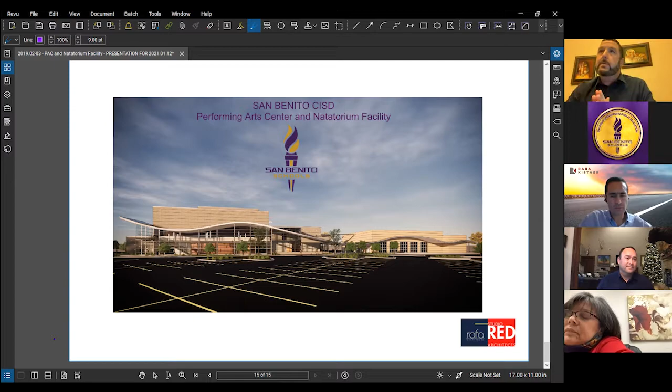And I have here—so we're in an A, is what you're saying? AH, A, an A zone. So this is something that's going to require flood insurance?

Let's see here, trying to pull that up. If I could jump in—go ahead, Mike. I was going to say that we have elevated our buildings several feet above the existing finished floor, close to 3 feet or more. You're kind of catching us off guard because we don't have the plans in front of us, but yeah.

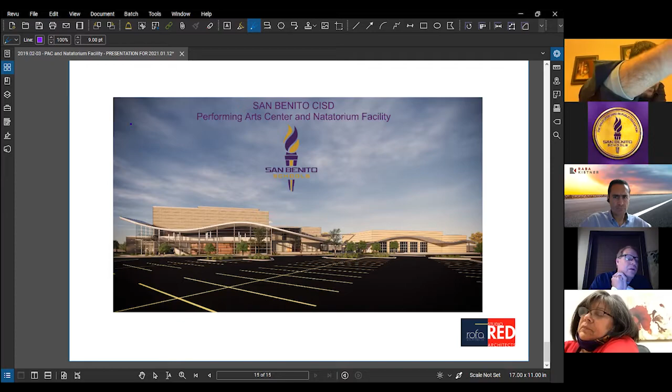But is it 3 feet elevated up on the 21 acres, or just on the actual structure itself? It's the buildings and the immediate surrounding areas and spaces between the buildings that are elevated, and then there's a gradual fall back to finished grade or existing grade some distance beyond. It just depends on where the outfall is. But one thing we wanted to make sure is that we were not any lower than the existing elementary school. We're slightly higher than the existing elementary school too.

I don't remember the exact numbers, but yes, we were concerned about the zone it was in, and we've elevated the building accordingly.

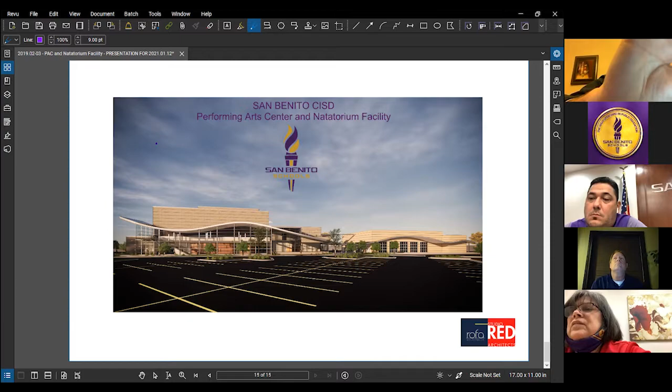Was this the right location? Because I love the location, don't get me wrong. I love the structure, I love everything about it. But what type of maintenance and what type of cost is it going to be afterwards—a long-term cost? That's what I'm looking at. Was it the right location to be doing it? Is it something we should have been doing at that location? Maybe we were supposed to have been told no. I'm not sure, that's what I'm asking.

Well, to answer your question, you wouldn't know until we probed this site. You wouldn't know until geotechnical was hired. You wouldn't have known until architectural and engineering looked at it. So we're taking the variables we've been given and maximizing the solutions we have to make sure there aren't cost overruns. And I'll give you an example: the introduction of GeoPiers saved us $2 million on not having to do hundreds of drilled piers.

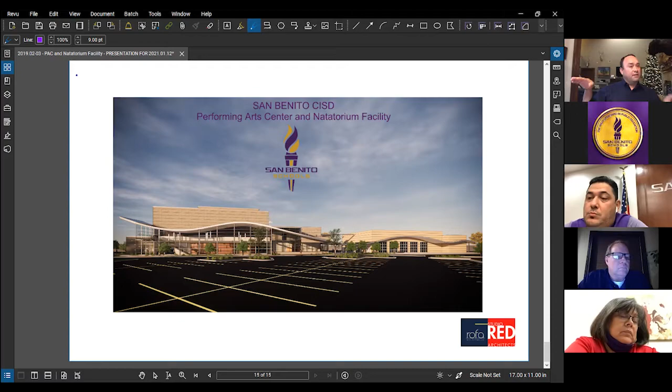$2 million. The fact that we have 21 acres plus means we can sheet flow the water, and as long as we have the finished floor elevation higher, that sheet flow naturally goes straight to our swales and has a direct outfall. So there are savings there as well. We took our negatives and turned them into positives, making sure there was a wash, or that we came out ahead of the negative we were presented.

And just like any construction—house, commercial, industrial, governmental—there are always underlying issues. The good thing is we have a strong group of professionals who have in their toolbox many solutions that lend themselves to remedying these challenges. So to answer your question, I think the site's a beautiful site. There are challenges, just like any other site, but we've remedied all of them, and it's going to be a beautiful site.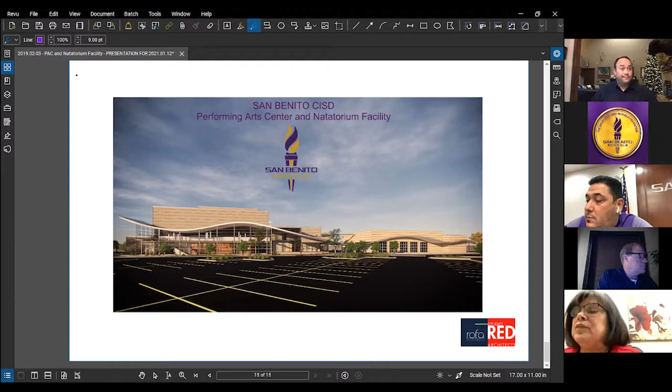Agree, it is a beautiful structure. Anything that's new is always beautiful, and it's a beautiful design. I'd have to say that. Yes, and I think it's a beautiful area too, very accessible to the public.

I had the same question. When you're going to buy a house, you have to pay someone to inspect the land before you buy it, to make sure there's no problems with the land. So I had that question too. So you're saying you all came up with a plan, but you couldn't know if you were going to have problems or not at that point?

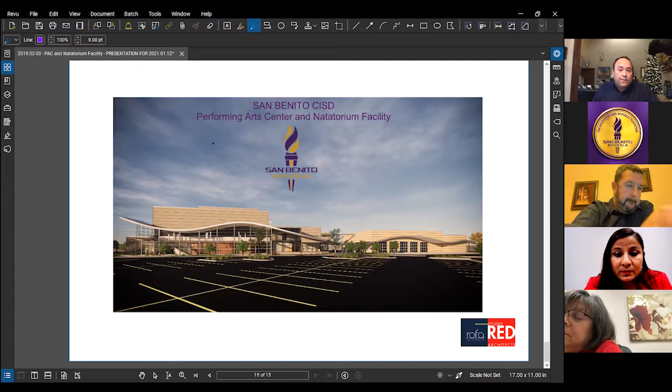No, that's not what I'm saying. What I'm saying is you all sold the bond and selected the site. We didn't select the site, we were given the site. We looked at it, and after hiring all the respective professionals, we looked at everything. We ran every test we could to identify all variables, to assure we have a plan to address those variables, and make sure we overcome them to stay within budget. And we have exceeded that.

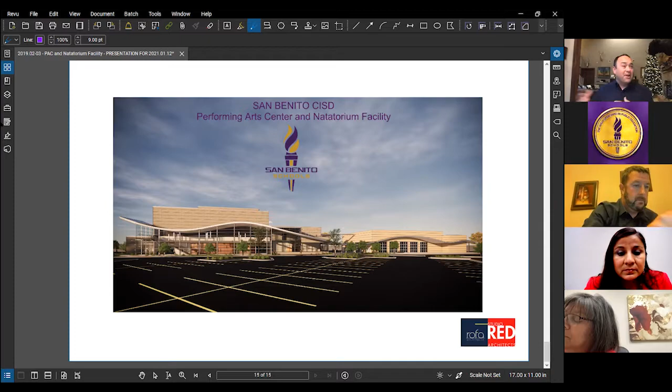Yes, there were challenges just like anywhere else, however we've addressed every one of those challenges and found positive outcomes. I'll be the last to say that was a bad site, because every critic will find a million reasons why not to do something somewhere. There's always a better location, always a better scenario. In this case, that land was bought by the district with an intended use, and we're maximizing the use of that asset, so you didn't have to buy other land, which would have posed other challenges choosing a different site.

So, having to prep the land didn't cost additional money? No, not at all, it belonged to the district. Thank you, Mr. Palacios. It didn't cost additional money to prepare the land for the buildings? Well, even on the indoor site, we had to prep that land no different. In every construction project, especially one like this, you're dealing with a pool, so you're excavating. You're going to have to prep the land. No site is a pristine site.

Right, I don't think you're understanding my question. My question was, because you had to prep the land due to the additional problems you found, did it cost extra? And did that extra cost take away from the actual building? No, I'm glad you're asking, I fully understand your question.

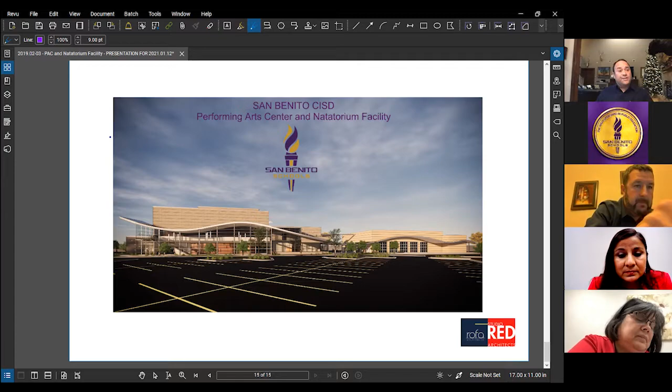So going back, we're excavating downward, using your existing soil to shape that land rather than bringing dirt fill in to adjust. We're using resources the land lent itself to, because we found different ways to address the foundation and soil treatments. So in essence, I can't say that caused extra cost. Now, I'll tell you one thing that maybe did, but it was going to be a challenge everywhere: your sewer, water, and drainage. If we had picked a different site, we would have had to spend more on a retention pond, as well as maybe another lift station, or other challenges.

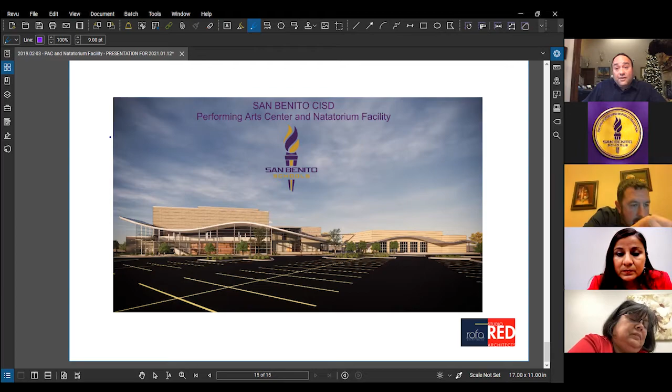I have not seen the impact. Now, yes, it is a big tract of land, and you do have to have support facilities for these buildings. You can't just build a vertical building without parking, road access, or certain elements. Those variables are going to pose themselves. We were blessed on the indoor site that there was existing parking, and it was a site that the district had that didn't require a whole lot. These are very big buildings, and like any building of this nature, there are certain requirements we have to meet, but I can't say it took away from the building.

You see the buildings as is. I want to applaud the Rofa Red Group, it's much more than the city of San Benito at first thought of or envisioned when the bond committees were meeting. We retained a lot of those documents, and I want to say we've expanded on their initial thought from the original bonds on all three facilities, and we're still around budget.

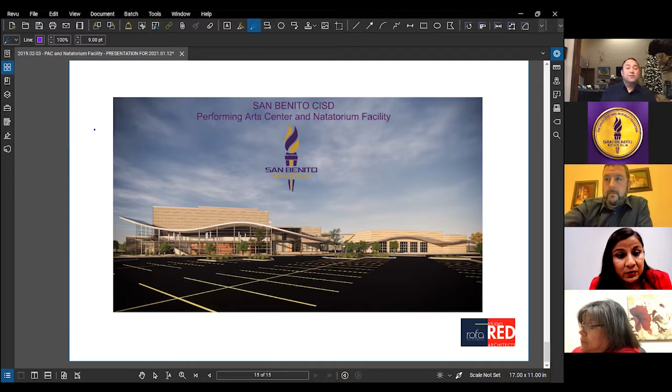You mentioned some things you had to negotiate with the city. Did y'all talk to the city beforehand and let them know this is what we'll be doing and this is what you'll be doing? Or did that come after? Because I don't think the city should be paying for a project the school district had $40 million for, and then telling the city you have to accommodate us. Those costs become additional costs that taxpayers may have to pay through water bills or other fees. So my question is, did you negotiate beforehand, or did it sound like you negotiated afterwards?

Well, just to clarify, we began negotiating with the city after we were hired and after everyone else was hired. We didn't do it beforehand. We weren't hired prior to that.

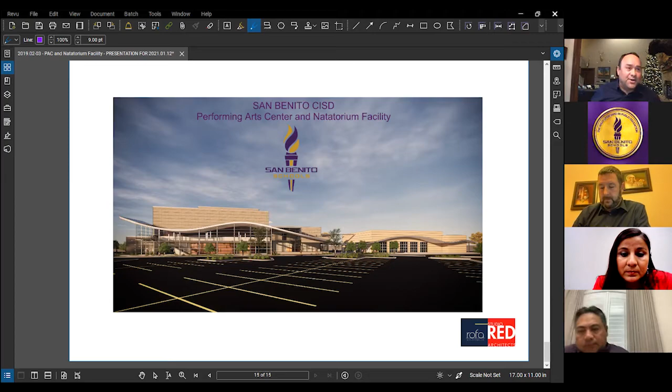However, let me address the lift station. That lift station services these two facilities for future use, but one facility right there services 80% residential area. The primary user is residential, so it belongs to the city. It's already charging rates to residential residents for that lift station. There are current TCEQ issues, and they've received funds to address and rehab these lift stations. So it wouldn't make sense for them to charge the district when they've already received funding to address those issues. 80% of the revenue, if not more—that's a lowball number—comes from residential use. The district should not be paying for that.

That's where I was leaning, having open conversations to talk about these things and assure cooperation. We're doing something cooperatively on the roadway, the intersection, the connection, the manholes—but we are going to be paying our service for these buildings as well, going to the city for use of that lift station. So we found a win-win where they asked us to address certain elements while they address the lift station. I applaud them for that. So no, the district didn't push off anything to taxpayers. We found a better means to an end by partnering with the city, and it worked.

Thank you for the clarification, sir.

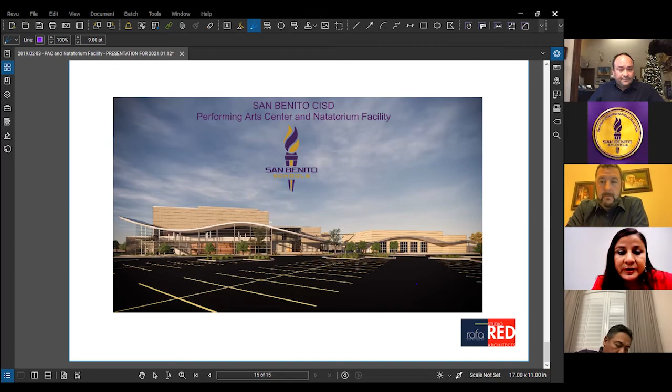Thank you, ma'am. Mr. Palacios, I want to thank you for the clarification. As far as these challenges, the board did its due diligence along with the bond committee to evaluate these services. We knew there were going to be some challenges, but at the end of the day, like the saying goes, you can't make an omelet without breaking a few eggs. So yes, we foresaw some challenges with the ground situation, but that wasn't going to deter us from making sure our kids had the facility they needed, and doing our due diligence to make sure this community had what they voted for. It's not a perfect scenario, but we did that.

As far as hiring additional staff to take care of certain things, there's a punch list—our staff are going to be checking that punch list, Dr. Carmen. I'm sure we can cross-train some staff to take care of those additional responsibilities as well. This is the infancy stages of this process, but as we move forward, I'm sure we can come together as a team and figure out how to share that responsibility. But the board, at the time, did its due diligence. We supported this cause, supported exactly what we wanted to do, and it's coming to fruition right now. Mr. Palacios, you've been extremely open about everything we needed to do, and we're still saving money and providing awesome facilities for our community and our kids.

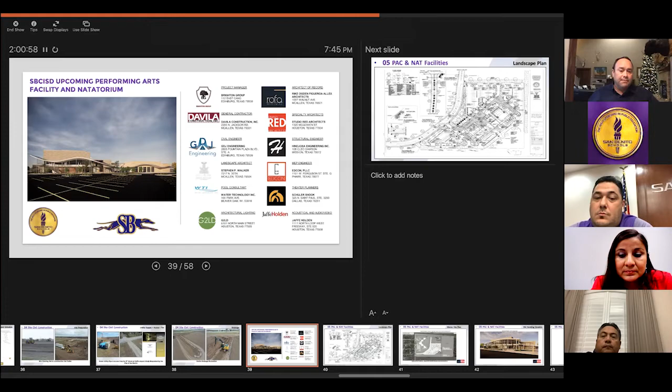But I'm glad we've gotten this opportunity to break down, and I was looking forward to this meeting. I don't know if you see, am I screen sharing at this point in time? Yes sir, yes, I can see it. Okay, so you could see the slides, right? Yes sir. Okay, so I'm having technical difficulties on my end. I apologize for that, but I wanted to get to the last slide because I do want to address this issue of budget. I'm trying to get to the screen, so bear with me for just a second. Okay, am I there? Are you seeing my screen now? It's moving, yes, your slides are moving, so you're like in slide 40.

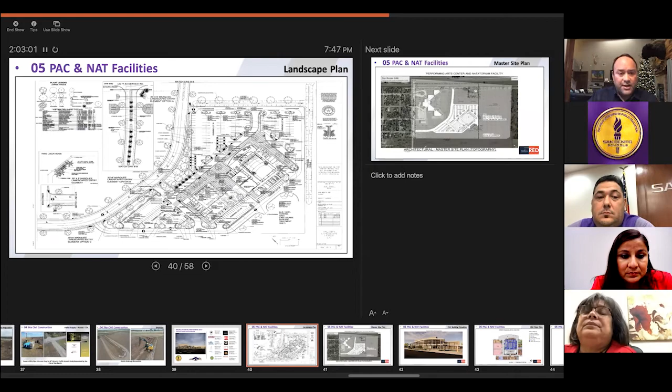Okay, so 40, right? This is a landscape plan. And just so I don't lose any more time, I'm just going to go quickly through this real quick. So we do have a landscape architect. Obviously, all these budgets are well within the package that the district has given us. The package has always been 40 million. Whether there's challenges or this or that or whatever, we've all been given the duty to make sure it works well within the numbers. I'll get to it in just a second. I'm going to fast forward through all of ROFA Red's plans and get to the last few slides to close and get to another. Okay, here we go.

Okay, so where we're at, we talked a lot about the buildings themselves. We do have 90% construction documents from the ROFA Red group that have been completed along with all their specifications. It is a mountain of paperwork that we have been going through, peer reviewing, meeting with the consultants, going back and forth, meeting with the contractor to make sure that we're budgeting, to making sure that we're assuring that we're right on line, within line. We have done this on every stage, and I'll explain the stages.

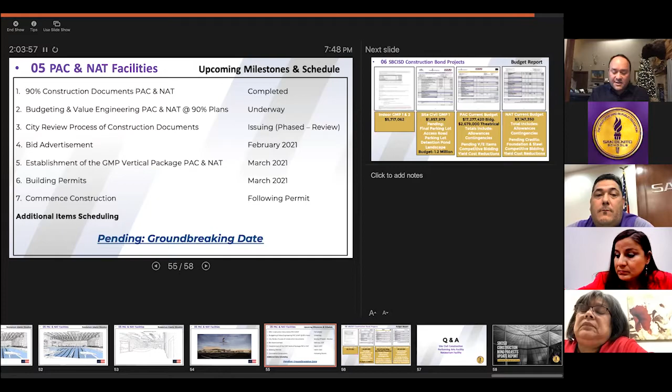Again, I'm going to take the CMAR, that's Construction Manager at Risk. That's a procurement process that the district had a choice to go either with the design build contract, a Construction Manager at Risk contract, or develop the plan, go to the market and go to low bid. In this case, the district chose CMAR. Now, there's so many benefits to it, and I'm an advocate of it because it keeps the process transparent. It makes sure that you select your teams and you work through every phase of the design process to price it, to assure that you're not going down a path you don't want to go. And so this at the 90%, we did it at the 50% construction document phase. It's very labor intensive because you got to go and decipher everything to assure that you can account for a cost. So we are going through that process right now with everyone.

And so we are in the budgeting and value engineering phase of the 90% plans. We have issued those plans to the city for a courtesy review. Typically, they do one review before they go to permitting. However, the city of San Benito, with their private consultant, is willing to take the plans and start initial reviews so that we can get through a lot of their questions and comments that we need to get through so that we make sure we don't lose any time. And so we're working with that at this point right now.

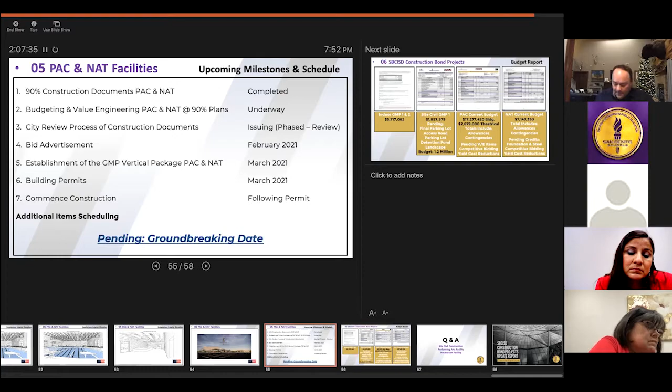Now going to the next slide. This is a snapshot of the budget, and it's a snapshot of the respective elements of this bond program. These are actual documents of GMP 1 and 2, guaranteed maximum price bids 1 and 2. The reason there were 2 is we had the offsite utilities we had to connect to, prior to all the civil work not related to the building, as well as the building itself. We've combined them together and we're at about 5.7 million. That's why you see the number a little bit up, because we included all the offsite utility requirements the city was asking for, like fire hydrants, all of that.

Going into the site civil guaranteed maximum price bid number 1, this encompasses all of the civil work, the crossing, everything - those costs were 1.8 million. The only thing pending is the final parking lot after they complete GMP 1, the access road, the lighting, the final detention pond, and the landscape. We're budgeting right now at about 1.2. That's a high number, but I'd rather be conservative than miss it, so I'm putting that number in.